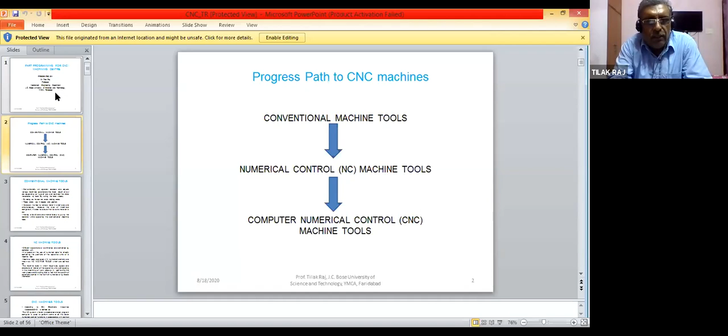You can see these NC machine tools here, in which magnitude, speed, and direction of motion of the operating units are controlled. What are the operating units? Different slides like X-axis slide, Y-axis slide, Z-axis slide. Sometimes we also have rotary units, so rotary motion is also controlled. All these are known as operating units. So here, speed, magnitude, and direction of motion are controlled, not only for positioning the workpiece, but sometimes for positioning the cutting tool also.

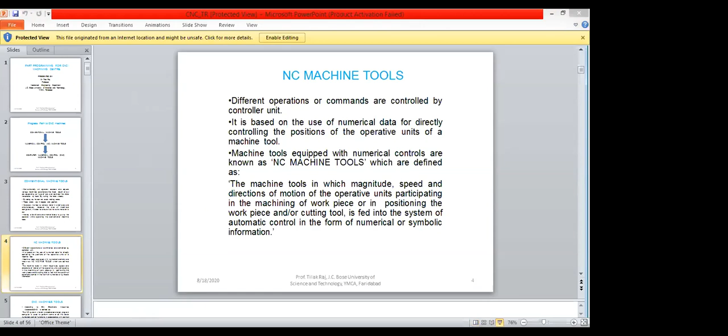Okay, so done sir, fine. Previously parts were manufactured on conventional machine tools in which feed motion of the slides and setting of the job was done by the operators, so many errors were made by the operators. So all the components made in one lot were not of the same quality and dimensions; major variations were found in them.

Seeing these difficulties in manufacturing good quality components, NC machine tools were developed, in which the magnitude, speed, and direction of motion of the operating units, which are participating in machining the workpiece or positioning the workpiece or cutting tools, could be controlled. This line is very important: magnitude, speed, and direction of motion of the operating units.

What are the operating units? Different units, you can say x-axis slide, y-axis slide, z-axis slide, or sometimes rotary units are also there in which rotary motions are given. So these are participating in machining of the workpiece or in positioning the workpiece or cutting tools.

Not only is the workpiece positioned, but the cutting tool is also positioned. So for controlling these types of operations, information is fed in the form of alphanumerical form to the controller of the machine tool. Why alphanumeric form? Because some information may be in the form of alphabets and some information may be in the form of numerals, that's why it is known as alphanumeric information.

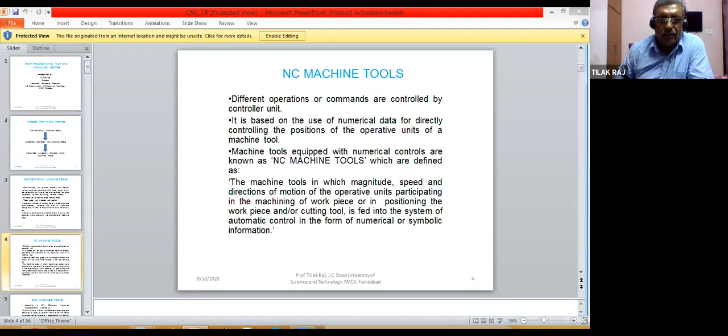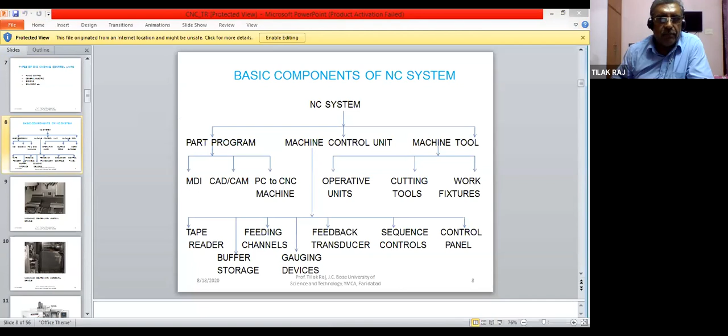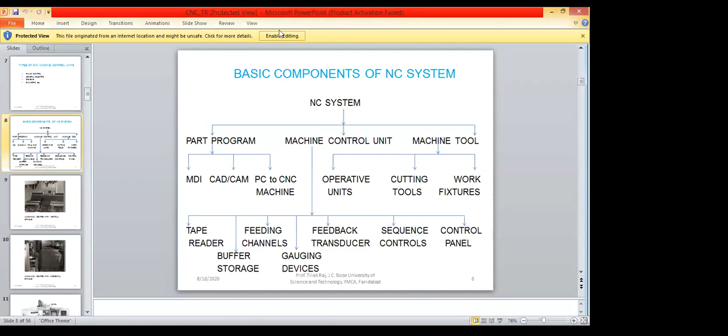Sir, your slide is still on slide number 4 only, but I'm reading slide number 8. Your slide is not moving. Why is it not moving? Please try a screen share again. Now it is on 8, sir, now it is visible. Should I move to slideshow? Please move the slides. Now it is clear. Can you see slide number 8? It is seen here, but the slide share is not done, sir. First, at the top you should click on enable editing.

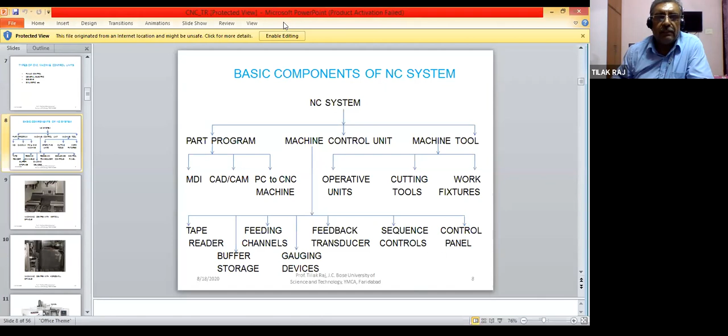The new share is there. Participants, security, annotate, remote control.

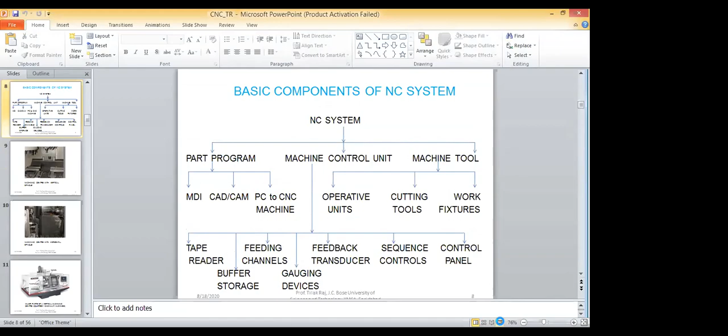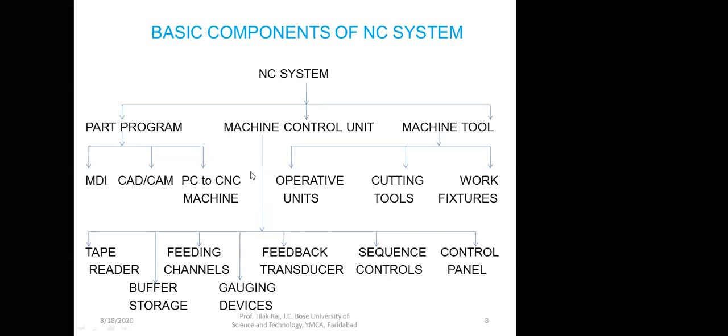So we were on the gauging device. Gauging device measures the actual movement of the slides, and they see whether the command has been obeyed by the servo motor or not. Feedback transducer - these transducers give feedback to the controller unit, so whatever command has been supplied to the servo motor, that has been activated or not.

Then sequence controls are there, so they manage the sequences of all the parts. Like tape reader decodes the tape, then buffer storage stores the information and supplies it to the controller unit, then feeding channels do their work, gauging devices and feedback transducer supply the feedback to the controller unit. So all this is done in a sequential manner, with the help of sequence controls. Next component is control panel.

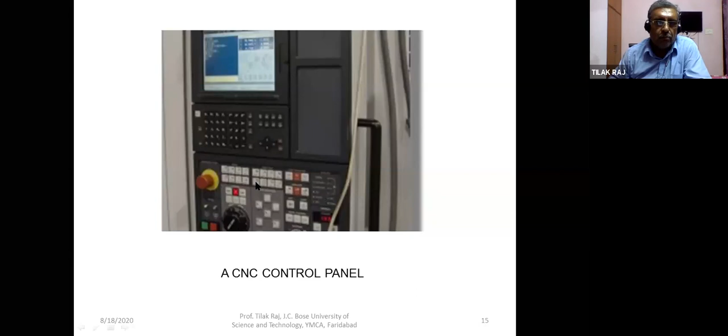Then different speed override, feed override buttons are there. Coolant control buttons are there - they can be on, off, etc. So the operator can do different operations with the help of these buttons on the CNC machine tool. This part is known as operator control panel, and this is known as machine control panel.

Then the third part is machine tool. Machine tool has different operating units, as I told previously - different slides are there, like x-axis slide, y-axis slide, z-axis slide. Not only slides, but other operating units are also there, like tool magazine, ATC - auto tool changer, for changing the tools automatically from the magazine and putting it into the spindle of the machine tool.

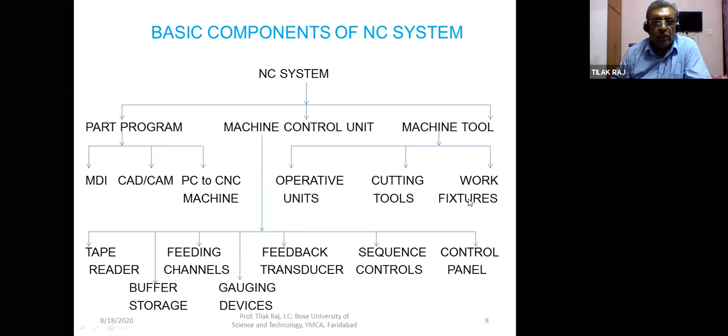Then cutting tools - different types of cutting tools like drill, reamer, boring bars, face mill cutter, end mill cutter are used. And then work fixtures - these are the fixtures used for holding the workpiece over the machine tool. Different flexible types of work fixtures are also used on CNC machine tools. So this is just briefly about the basic components of CNC machine tools.

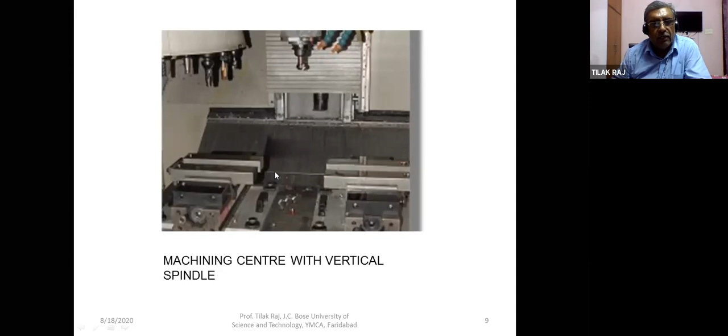Another version is horizontal machining center - machining center with horizontal spindle. So here you can see this spindle is horizontal, that's why this is known as horizontal machining center, or machining center with horizontal spindle. These two types are mainly used.

But otherwise, a third type is also there, known as UMC, Universal Machining Center, in which the spindle can be oriented in vertical position, horizontal position, as per requirement, or in any inclined position also. So you can change the position of the spindle - vertical, horizontal, or at any angle you want, say 60 degrees, sometimes a hole is required at an angle, so that can also be done. That's why it's known as Universal Machining Center.

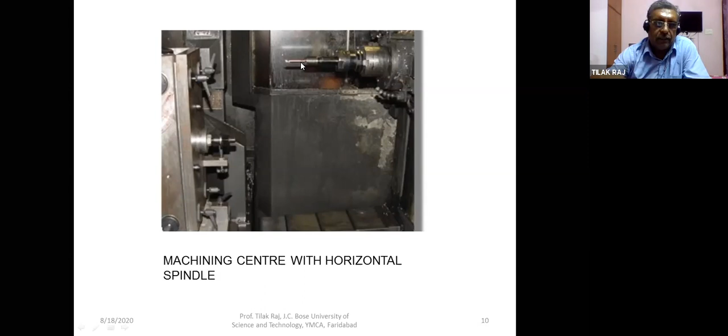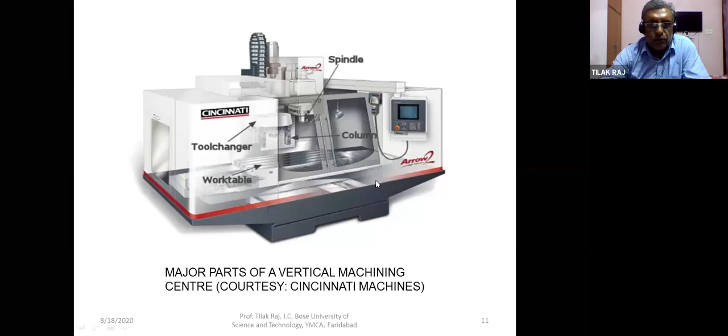This is the tool magazine, a vertical type of tool magazine. You can see a number of parts here. A small tool magazine can be round type, in which 8 or 10 tools can be mounted. Sometimes we can mount 90 tools, 120 tools, or 60 tools. Whenever a large number of tools are to be mounted, this large magazine is used. Here you can see the tools mounted on the tool magazine.

These are different pods, known as tool pods. This is one tool pod, this is another, and side by side this numbering will be there. If 60 tools are there, the numbering will be 1 to 60, 1, 2, 3, 4, 5, like that. This marking is there for each tool, so that whatever tool you put in any pod is known - if you put a tool in pod number 1, it will be known as tool number 1.

So you will use T01 for that in the part programming. If you put a tool into pod number 5, you will use T05 for that tool in the part programming. In this way, tool numbers are given for identification in part programming, and there should not be any mistake. Suppose in part programming you are using a tool of 10 dia and you have given tool number T06 - you should take care that this tool is in pod number 6. Otherwise, a mistake will be there.

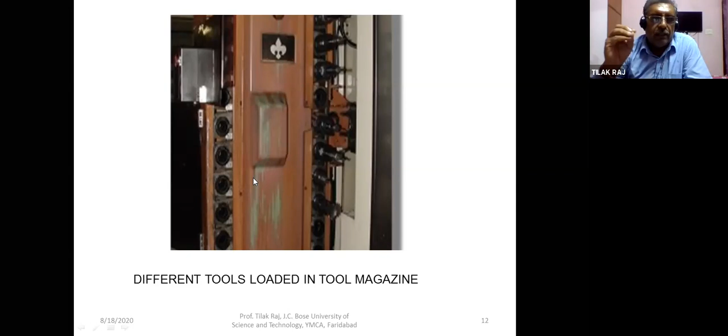Okay, so in this way, automatically our work is controlled. Then these are the tool holders and cutting tools of the CNC machine tools.

A specific shape is given to the tool holder. This tool holder has a special taper, which can be ISO taper or BT, meaning British taper. According to these standards, the tapers are prepared, and the same taper will be there in the tool magazine pod and in the tool spindle also.

Here the tool changer grip area is there, so the tool changer arm will grip this tool holder, and in this position you can put the tool. This is the actual cutting tool, and this is the holder. You can mount the cutting tool in it, tighten it with this grub screw, and then put this tool into the magazine or in the spindle.

This is known as the retention knob, and this portion is the pull stud. Threading is done here, so with the help of the threaded stud, it will go into the holder. This retention knob is there for getting a kick from the spindle whenever a tool change is to be done from the spindle or from the tool magazine.

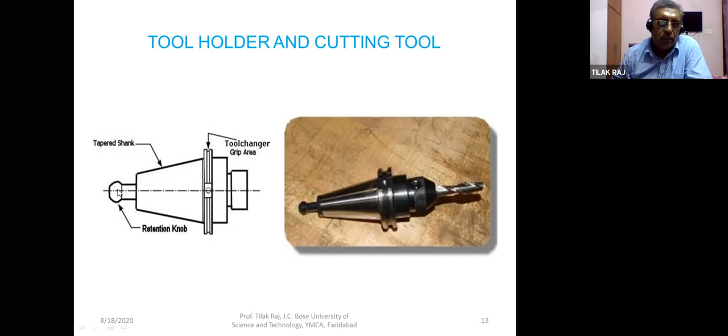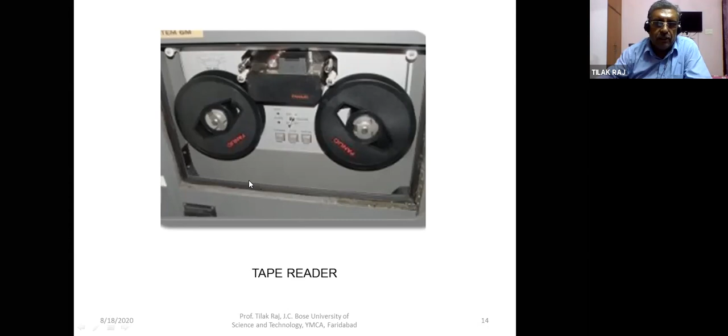So this is the work of the tape reader. And this is the control panel, already discussed.

Then the NC machining procedure. Before we go to part programming, we should know the machining procedure on CNC or NC machine tools. Different steps are there; the first is part drawing study.

First, carefully study the part drawing. See what type of operations are required on the component, whether drilling holes are required, or some milling work is required, or whether it is for a machining center or turning center, and what type of machine is to be used.

First study the part drawing and note down the different operations. If holes are required, note the size of the hole and the accuracy required, whether accurate and precision holes are needed or general holes. For example, if I write dia 20 hole, it means general tolerance holes. But if I write dia 20 H7 hole, it means H7 tolerance is required on the hole, and a reamer will be used for that to produce a good quality hole.

Then process planning: as per the operations required, process planning is done, determining what operation should be done first, second, third, and so on. A process planning sheet is prepared.

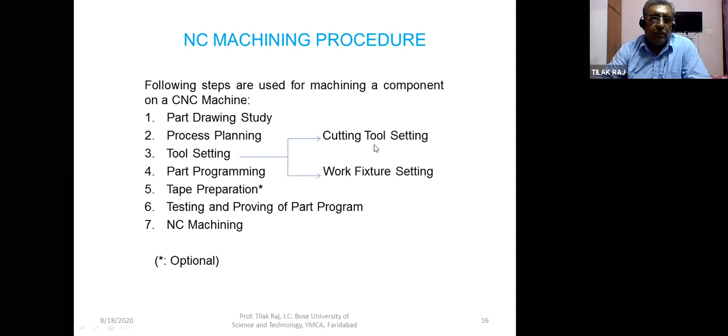If any error is there, it will be observed during machining of the components, and components can be rejected due to a small error in the part program. Sometimes accidents may also occur during machining if these errors are not removed. After testing and proving the part program and removing the errors, actual NC machining is started.

Now, fundamentals of the part program. First we should know what a part program is. It is a set of instructions in the form of alphanumerals to be followed by the operating members of the NC machine tools for machining a particular component. In simple words, it's a set of instructions in alphanumeric form - alphabets and numerals - to be sent to the MCU, machine control unit, of the CNC machine tool for controlling different operating members of the machine tool.

So what should be the desired qualities of the part program? One should have some understanding of the part drawing - whenever a part program is to be prepared, one should be able to read the part drawing: what is needed, what type of operations are needed, what is the material of the component, whether it is soft or hard, what type of cutting tool materials will be needed, whether HSS will do, or whether the cutting tool should be of carbide or ceramics, etc.

Once one is able to study the part drawing, only then can he have further discussions about the operations to be done on the part. He should also have some knowledge of mathematics.

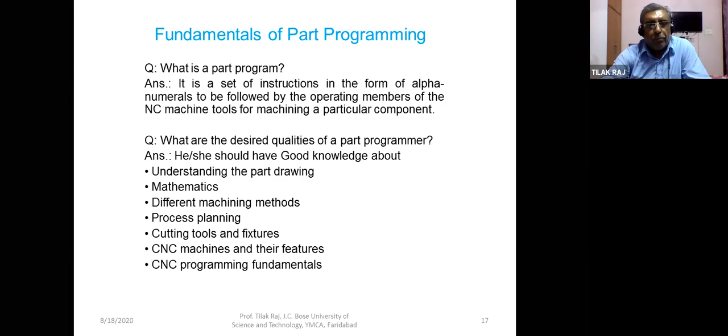Then, standards of functions of part programming. There are two types of standards: one is the EIA part programming system, another is ISO based. EIA means Electronic Industry Association system, and the other is the International Standardization Organization. In this course, we will discuss everything based on the EIA RS-244A type system.

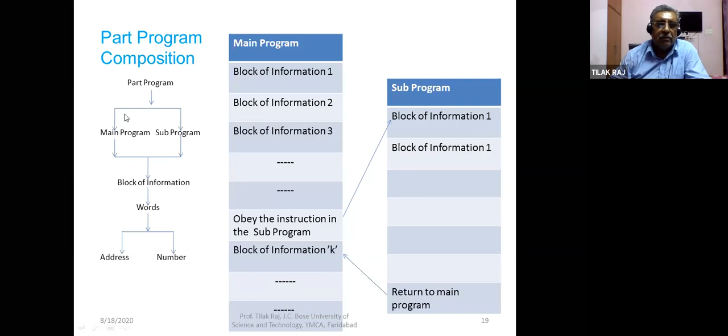So here some addresses are used in the CNC machining center. We are basically discussing the codes of the FANUC system. I have taken these codes from the FANUC system, but as I told earlier, if you are conversant with any system, you can prepare a part program in any controller unit like General Electric or Siemens—any control system you can handle, but the basics should be clear. So one thing is the ISO address and their meaning.

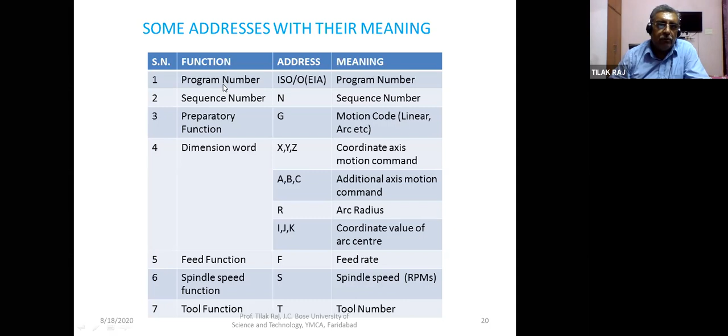ISO can be used for part program. First of all, you have to give the part program number. Whenever we are preparing any part program, you will have to identify this as the ID of the part program. The ID is given with the help of ISO, or O in capital, in the EIA coding system. So if I use O, then if I use O1000, 1000 will be the number of that part program, and O will identify that it is in the EIA system.

Then the sequence number. Any block of information is addressed by capital N.

With that, some number is given. Then preparatory functions are there, like G code. That is the preparatory function. For different linear and arc curvilinear motions, we use different G codes.

Then we use some addresses X, Y, Z. These are all dimension words. X, Y, Z are coordinate axis motion commands. A, B, C are used for additional axis motion commands, basically rotational axis.

If you want rotation about the X axis, A is used. If rotation is about the Y axis, B is used. If rotation is around the Z axis, C is used. So these are additional, or rotational, axis motion commands.

So basically a CNC machining center can be of 3-axis type: X, Y, Z. But it can be 6-axis also if you have these 3 rotational axis facilities too.

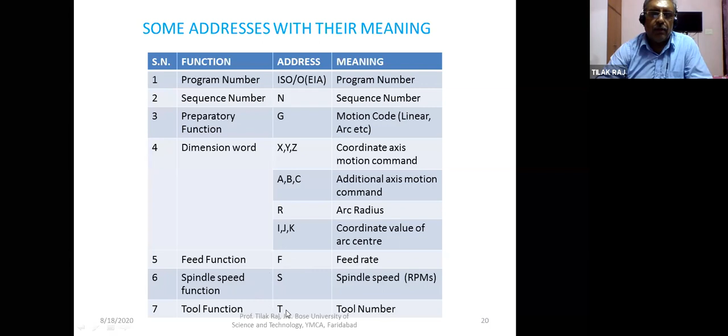Then miscellaneous functions, M is used, like for on/off control of the machine tool or tool change, such as M01, M06, M07, M08. These are different miscellaneous functions used for controlling the machine tool.

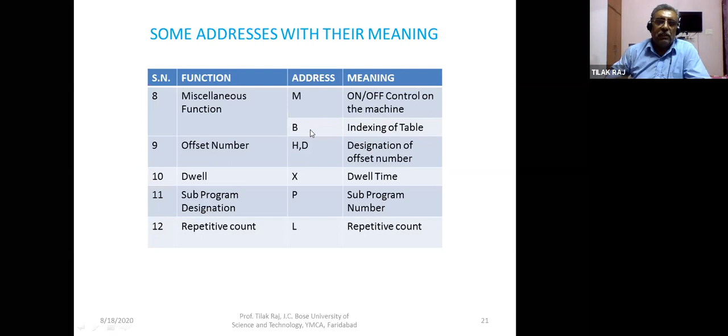And then B is used for indexing of the rotary table. Whenever a pallet is used in a horizontal machining center, or a rotary table is used in a vertical machining center, indexing of the table is done with the help of capital B.

Then offset numbers can be defined with capital H or capital D. Length offset is defined by capital H, and radius offset or compensation is defined by capital D. How they are used we will see in the coming slides.

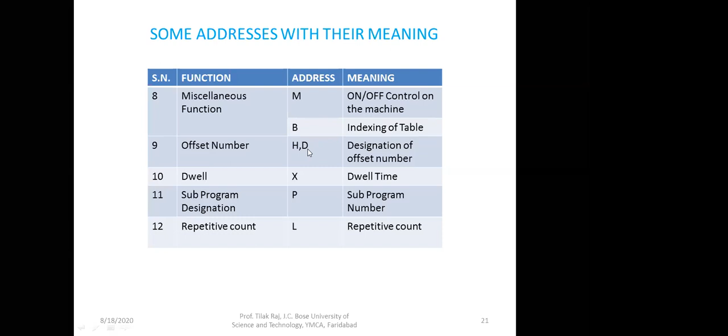Then dwell: anytime you want to stop a machine tool for a particular time, it can be dwelled, and some time can be defined. So X5 means you can stop the machine in a particular position for 5 seconds.

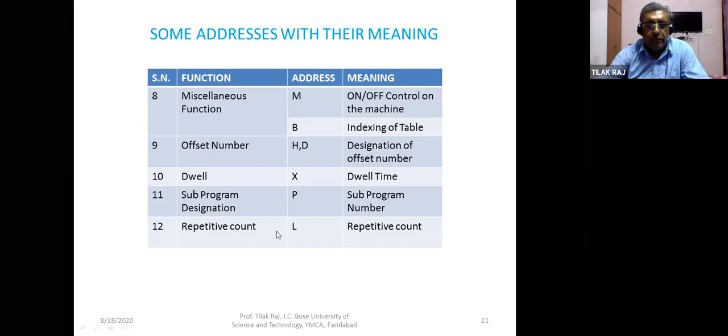Then capital P is used for subprogram designation. Main program designation is capital O, as we have seen in the previous slide, and subprogram designation is capital P. Capital L is used for repetitive count, anytime you want to repeat any function.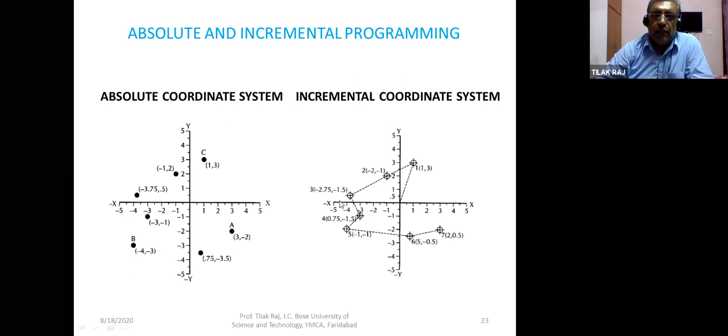Accordingly, these are known as absolute programming system and incremental programming system. So if you are using absolute coordinate, then it is known as absolute programming, and if you are using incremental coordinate, then these are known as incremental programming system.

Then you should know what is machine zero and program zero. Machine zero is a position located at the farthest possible distance in the positive direction along the machine axis, all the axes - x-axis, y-axis, z-axis. This is permanent, and is set for each particular CNC machine tool by the machine tool builder. So that is the machine zero.

And program zero, this is also known as work zero, the position that acts as the origin for the part program of a particular workpiece. Suppose any table is there on the CNC machine tool, then the workpiece may be located on this table anywhere. So the machine should know what is the position of the program zero, from where the program has to be started. For that, one particular corner of the job is set, so that is also known as work zero or program zero. So for making the component position known to the machine tool, this program zero is defined. This is changeable for every component, depending on how you are fitting it, how you are putting it on the machine tool table.

That position will be different for each component, and that should be well defined and told to the machine in the form of work offset. Work offsets are generally defined in G54, G55, G56, etc. These are different preparatory functions in which this work coordinate, or program zero, is defined. Work coordinate and program zero, work zero and program zero, are the same thing. So for each component, this is the basic definition from where the program will start, this program zero.

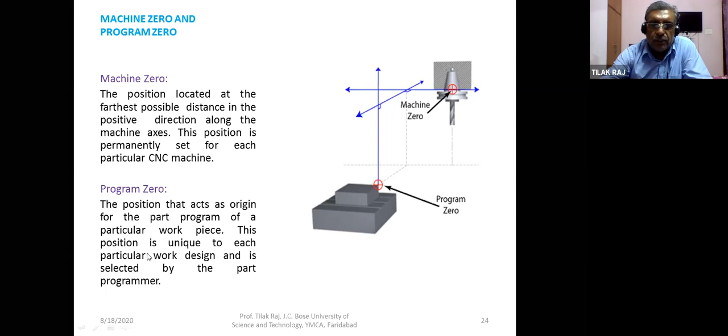Then coordinates. Basically three linear axes are there in the CNC machining center, and three rotary axes are there. As I told you, x-axis, y-axis, z-axis, three axes are there. If the rotation is around x-axis, the additional axis is known as a-axis. If the rotation is around y-axis, this is known as b-axis. If the rotation is around z-axis, this is known as c-axis.

These are the coordinate systems, and they are defined by the right hand rule. In the right hand, the position of the thumb gives the x-axis, the position of the front finger gives the y-axis, and the middle finger gives the direction of the z-axis. So the right hand rule is followed.

You can see here on the actual machine, x-axis, y-axis, and z-axis. Generally the z-axis is perpendicular to the machine table. If it is a vertical VMC, vertical machining center, the vertical spindle will be there, and the table will be in the XY plane. If it is horizontal, then the spindle will be perpendicular to the work table, or to the component which is positioned on the workpiece on the machine table.

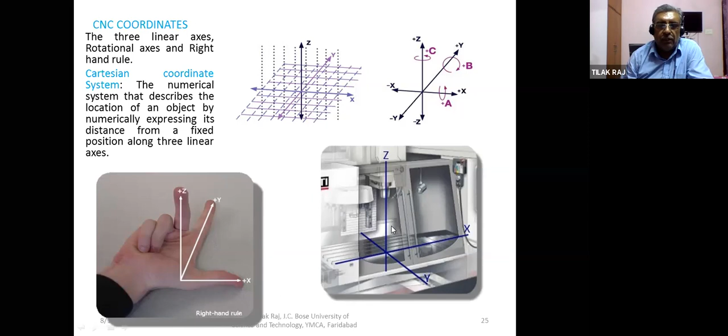Now the main codes. Two types of codes are used in CNC programming. One is preparatory codes, also known as G codes, and another is miscellaneous codes, or M codes. So one by one we will discuss all these codes.

G codes: G00 is for rapid traverse. Whenever you want to move the machine table in rapid mode, you will use G00. Suppose this is your current position or start point of the machine, and you want to move to this end point, that is 50 in the x direction and 30 in the y direction. So you can give G00 X50 Y minus 30.

Y plus is in the upper direction, and in the lower position it is minus 30. So you can give G00 X50 Y-30. In this position, the machine will move rapidly to this end point, and it will reach here.

But if you want to move in linear mode, for some cutting, then it will be defined by G01, that is linear interpolation. So linear interpolation is defined by G01.

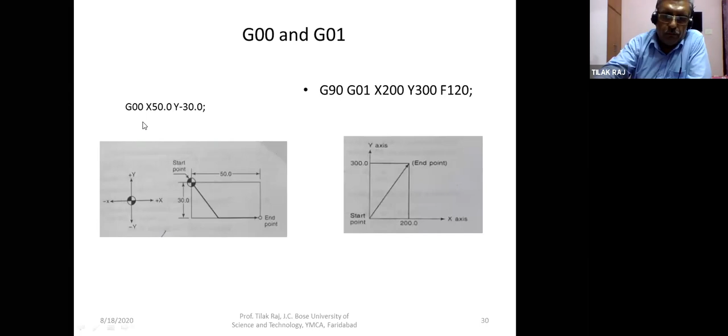Then G02 and G03, these are for circular interpolation - circular interpolation clockwise and circular interpolation counterclockwise. If you want to do the machining in a clockwise arc, then G02 will be used. If you want to move this tool counterclockwise, then G03 will be used. So we'll see the example.

Before that, G17 and G18 are also defined, for understanding the planes. G17 is for XY plane selection, G18 is for ZX plane selection, and YZ is defined by G19. They are used in some cases.

So here you can see, this is G02 and G03, you can see in G17 plane, G18 plane, and G19 plane. So clockwise motion is done with the help of G02, and G03 is for counterclockwise.

And then you have to give the end point of the arc. So first of all, you have to define the plane, whether it is XY plane, then G17, then G02 for clockwise, and G03 for anti-clockwise or counterclockwise. Then give the end point of the arc - these are the end points of the arc.

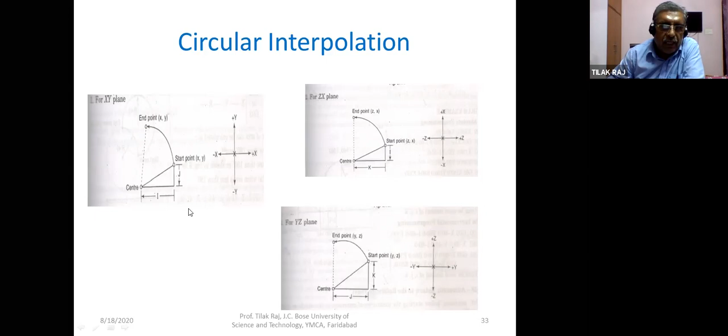So here you can see some example is given. Generally people get confusion with I and J. You can see here this example - let us say this arc is there. Its start point is X 200 and Y 40. From here we are starting.

So G90 absolute programming, G03 because it is anti-clockwise. End point of the arc - what is the end point? X 140, Y 100. Then I and J - what is I? I is the distance in x direction from start point to the center of the arc. How much? 60. So this is in negative x direction, that's why I minus 60, and then feed is given. In I and J, there is no incremental distance in y direction, that's why J is 0.

Similarly, for this arc, you can see - so what is the end point of this arc?

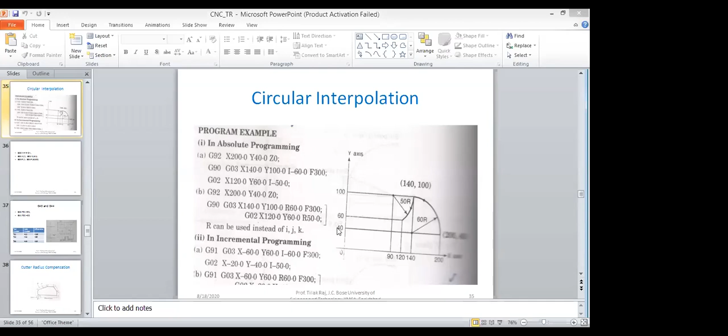Now it is okay, yes sir, everything is okay. Please start sir. So we were here, we were discussing this arc.

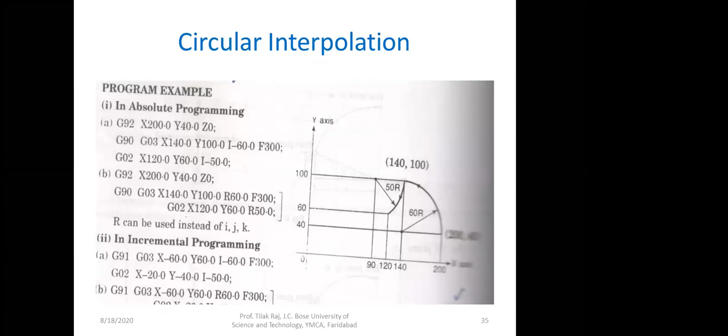So now if you take example of this arc, then it is in clockwise direction in this way, so we will have to use G02. Here the endpoint will be 120 and 60, and you will have to move from start point to the center 50 millimeter, that's why I minus 50 is written. G02 X120, endpoint of the arc X120 Y60, and I this one. And then the same feed will be obeyed. So this is the example.

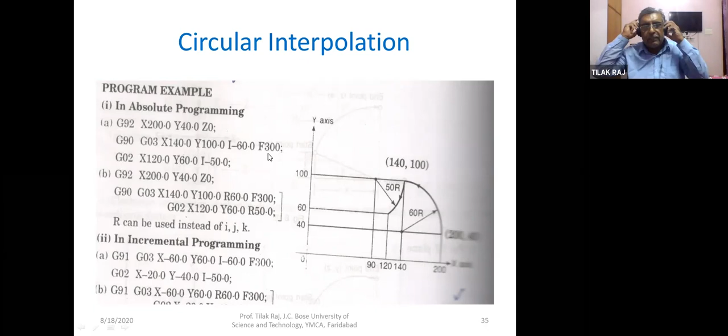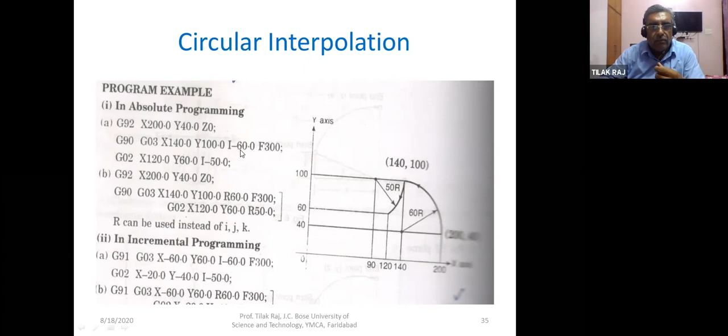So generally people make mistakes, they are not conversant with this use of I, J, K etc. So for that you can simply use the radius command also with the help of radius. So you can see here this case - G02, you can see example of this arc.

When the arc is less than 180 degrees, the endpoint of the arc and radius can be used. When it is more than 180 degrees, then radius minus, r minus, can be used. Both arcs are there, but one is less than 180 and the other is more than 180. It is very simple to define the arc with the help of this radius system, the radius command. In I, J and K some mistakes can occur, but with this method no mistakes are there.

Hello. Hello, Vimlesh. Yes sir, yes sir, okay.

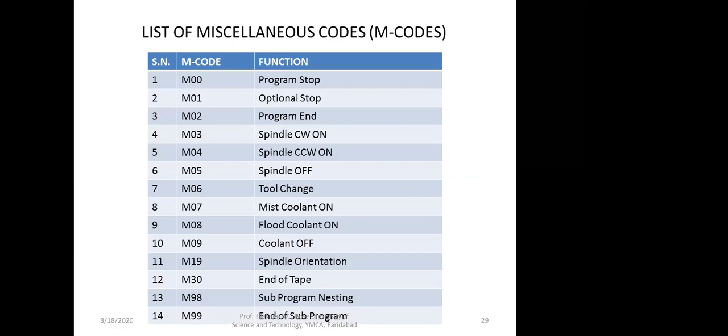Then there is dwell, dwell time. This dwell time is defined with the help of G04. What is dwell? Anytime you want to stop the machine at any position, like for your spindle, you don't want to stop the spindle but want to rotate it at the same position. Let's say a grooving tool is being used and you want to do grooving at the same position for sufficient time so that a good finish is obtained. Then you can stop the spindle from moving forward, it will keep rotating, but you stop it at the same position by dwelling it. You can give time with G04 like X5, meaning for 5 seconds it will be stopped. It can also be done with the help of P, G04 P, but you will have to multiply the time in seconds by 1000, so P5000 you will have to define. This is used for dwelling purposes.

Then G17, 18, 19 are used for plane selection.

G20 is used for inch input. Whenever all dimensions are in inches, G20 can be utilized. Whenever you want to use the metric system, G21 is used. G28 is used for returning the machine tool to the reference point, in mm. So G28 X0 Y0 Z0 can be given. That is generally done.

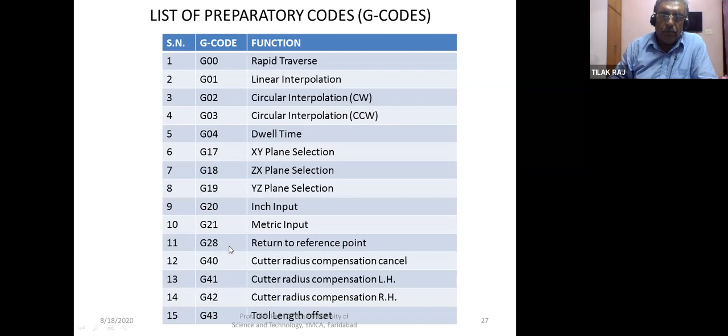Let's say a factory is running in two shifts, morning and evening. After the night shift, no work is there, and machines will be switched off at night. So whenever a worker comes in the morning and starts the machine, it is necessary to reference the machine, to read the machine zero, because the machine should know where its zero is, then it will start working from that zero. This can be done manually with the help of manual jog, or it can be done automatically with the help of G28 X0 Y0 Z0. So it will reference the machine to its reference points.

Then G40, 41 and 42 are used for radius compensation. G41 is used for cutter radius compensation on the left hand side, and G42 is used for cutter radius compensation on the right hand side, and G40 is used for cancellation of both types of compensation. We will see in the slides how it is done.

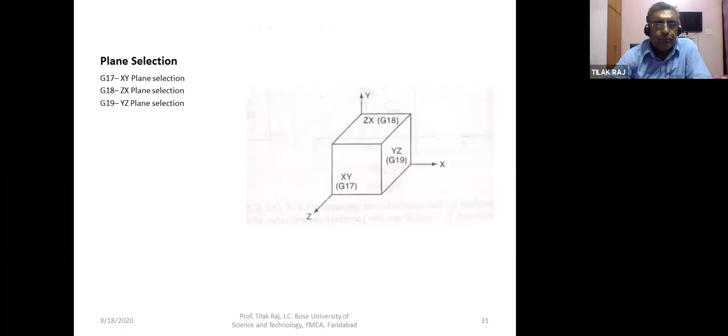But the cutter will be shifted and it will cut the end surface of the job. So there are two types of cutter radius compensation: G41 and G42.

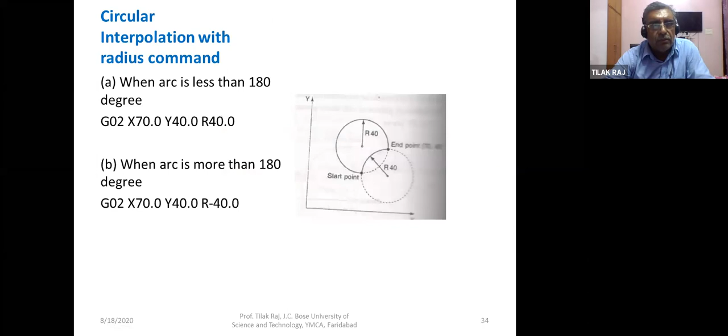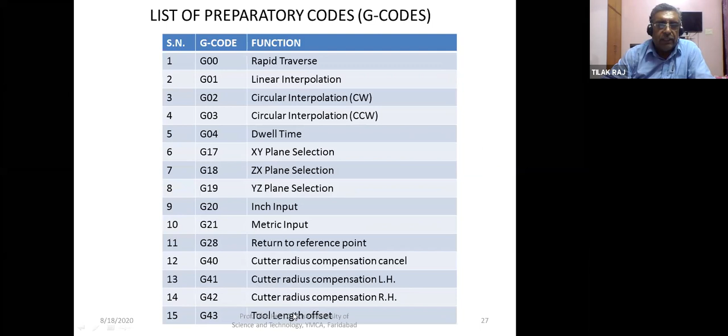After its use, it will be cancelled with the help of G40. Whenever compensations are used, they are cancelled also, so with the help of G40 it is cancelled. So these are for radius compensation. And after that, tool length compensation - tool length offset or tool length compensation is activated with the help of G43 and G44. G40, G43 and G44.

Now all the tools may not be of the same length, their length may be different, but we want that every tool should come - and if this is the top surface of the job - every tool should come and stop at 2-3 millimeters above the job surface, and then it should start cutting, drilling, or whatever operation is there. So now how is this made possible? Tools are of different length, the job is same, the machine is same. How is it done? This is done with the help of activation of tool length compensation.

So tool length compensation is activated with the help of G43, then tool number, and it is done with the help of capital H. As I told you, capital D is used for radius compensation, and H is used for length compensation. There is, in the MDI - manual data input - one page in the computer in the CNC, where these details will be there: tool number, code number, and offset value.

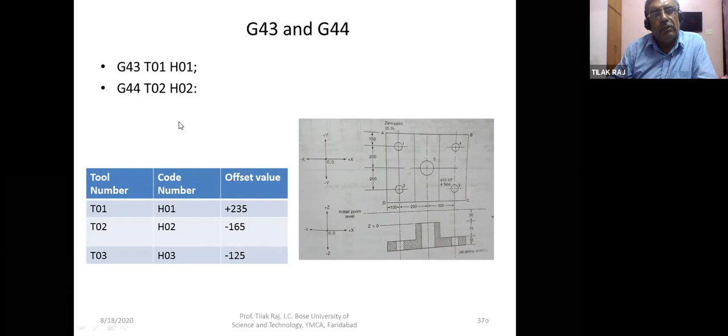H02 will read minus 165, H03 minus 125. So if it is positive, you have to use G43. If it is negative, you have to use G44. After its use, you have to cancel it with the help of G49. So G49 is tool length offset cancellation, also known as tool length compensation cancel. Tool length compensation or offset is the same thing.

Then G54 to G59, these are work coordinate systems. Work coordinate system is used to define the position of the workpiece over the table. The table of the machine tool is very large, and you have to put a fixture on the table, then mount the workpiece on it. Now how will the machine know the position of the workpiece over the table? For defining this position, the work coordinate system is used. There are six types of work coordinate systems: G54, 55, 56, up to G59 you can use. Let me show you one example.

Let us say this is the top surface of the job. You have put this job over the table, and this is the thickness of the job. So how do you define any one corner of the job? You can define it as the work coordinate offset or work coordinate system.

You can use a stylus to touch one side of the job. If this is the X and Y position of the machine table, then if you touch here, it will give you the Y value with the help of the stylus. You note whatever reading comes on the screen of the computer.

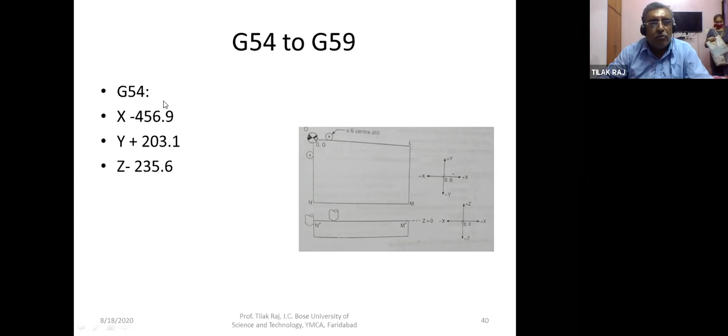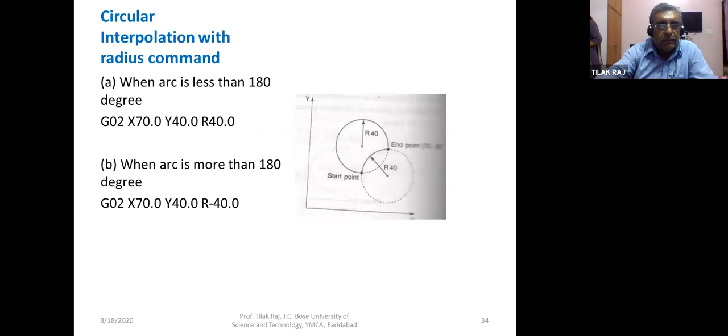Next is G54. Then G73, G74, G76 - these are machining cycles, also known as canned cycles. What is a canned cycle? A canned cycle is a cycle in which multiple tool operations are done with the help of a single command.

For example, G81 is a drilling cycle, so with the help of this cycle, drilling can be done. This is the peck drilling cycle, so peck drilling can be done with this. So any cycle where multiple tool movements can be defined with a single command is known as a canned cycle.

So wherever 'cycle' is written, these are the canned cycles. This is fine boring cycle. This is peck drilling cycle, drilling cycle, cycle with dwell time, and this is again peck drilling cycle. These are the different cycles used for machining purposes.

First, I will give you the example of the drilling cycle. Whenever simple drilling is to be done, G81 can be utilized. But when the job height is very large and the diameter is small - let's say a 5 millimeter or 10 millimeter hole in a 100 millimeter height component - in such cases, simple drilling will not work.

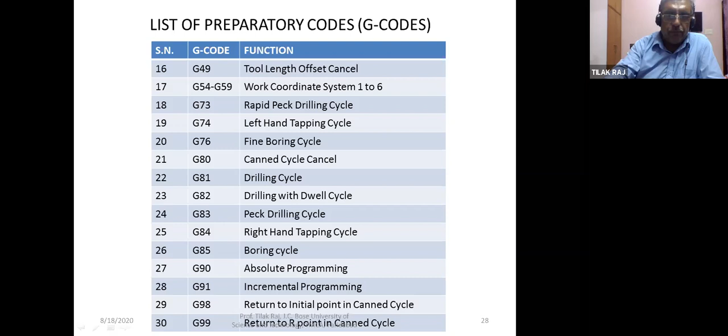So this is simple drilling cycle. You can see here G81. This is the rapid plane, known as R plane. Up to this, the tool will come rapidly. Then it will cut the job in cutting mode, and then it will revert back. So three movements are there: this, and this, and this. So multiple tool movements are there. That's why it is a canned cycle.

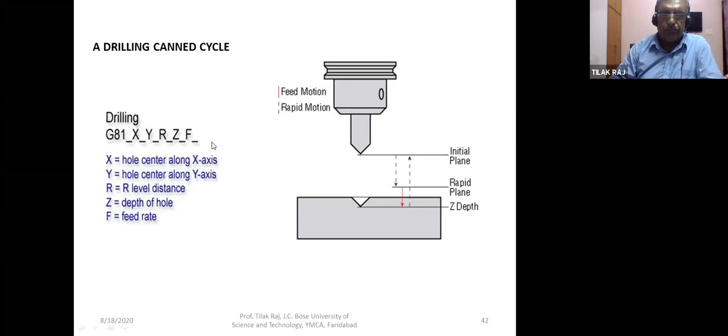So you will have to define in G81 the hole location, wherever drilling is to be done, the coordinate of the hole. Then R plane, the rapid plane - 2-3 millimeter above the job, you can define it. And then Z, what is the depth of hole, and then feed rate. So with the help of this, simple drilling can be done.

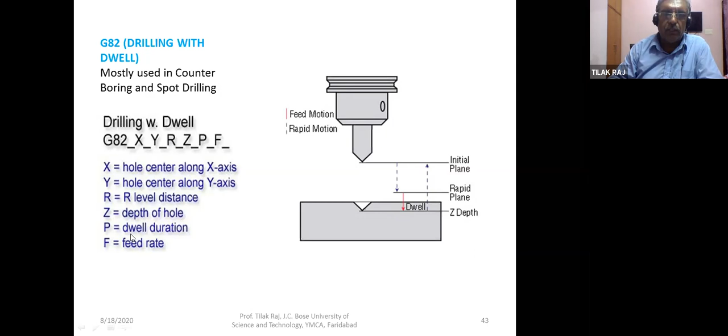Then G82, you can say this is with dwell. If you want to stop the tool at the bottom of the hole for a particular time, then it can be done with the help of dwelling. So you will have to give some time for that. Same X, Y, R, Z, F values are there. X, Y is the coordinate of the hole, R is rapid plane, Z is the depth of the hole, P is the dwell time - how much time you want to rotate the tool in the same position. 5 seconds, 10 seconds, etc. You will have to give the dwell duration. So with the help of G82, it can be done.

Then G73 and G83 - these are peck drilling cycles. In peck drilling cycle, the whole depth of the hole is not done in one go, as was done in simple drilling cycle, but in steps. First this step, then the tool goes back, and then it increases the depth up to this, then it goes back, then further increases the depth and goes. So in this way, chips are also cleared when it is returning back. This is the case when hole diameter is smaller but height is large. In such cases, if you do simple drilling, the chips will clog with the tool, and there are chances of breaking of the tool. So in such cases, it is done in steps with the help of peck drilling.

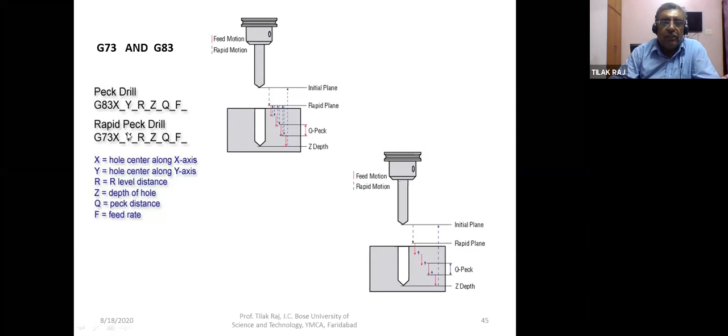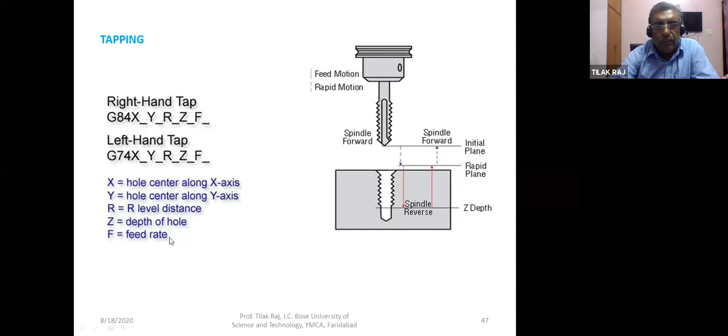These are other examples of this. Then tapping - internal threading is done with the help of tapping. Tapping can be left hand tapping or right hand tapping. Left hand tap is G74. Again it is simple - you have to define the same XY position of the hole, R rapid plane, depth of the tapped hole, and feed rate. Then G74 or G84 as per the right hand tap or left hand tap you have to use. So for tapping, G74 or G84 can be utilized.

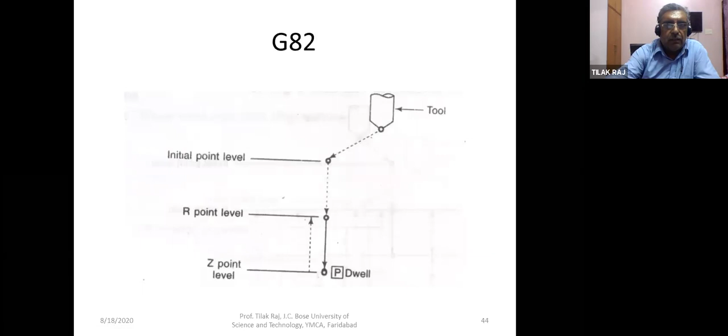One more thing is there, G76. So those were the simple boring cycles, in which, as I told you, the tool stops at the bottom and then is retracted back. But whenever you have to do some fine boring, let us say, bore of a car engine.

You are giving the final touch to the bore size. Let us say bore size is 100 millimeter plus minus 5 micron only. So 5 micron tolerance is to be maintained, but the finish should be a glass finish, it should be good.

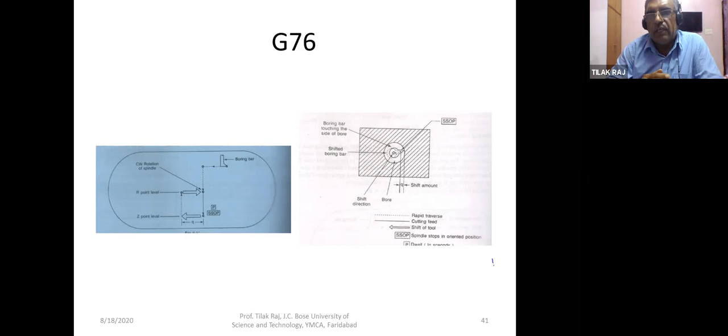So if you are doing this with the help of rough boring cycle like G85, G86, then the tool stops at the bottom and is retracted back. So when it is retracted back, it touches the side of the bore, and it will put a scratch mark over the inside of the hole. So which is not needed, it will damage the quality of the fine bore.

So for that, this G76 is used, that is the fine boring cycle. In that, what is done is when the tool stops at the bottom, it is shifted to one side, away from the wall of the hole, and then it is retracted back.

Okay, so that is the depth. So in G76, everything is defined: it will stop at the bottom of the hole, then it will orient in a particular direction, then stop, and then be retracted back.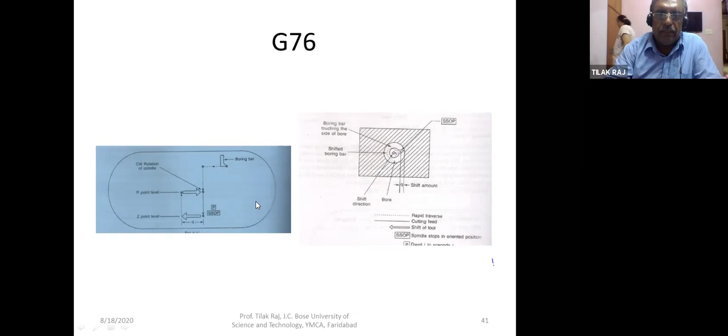So in this way, you can see here also. It will stop, orient in a particular direction, shift to a particular side, and then retract it back. So in this way, it will not touch the sides of the hole and will not damage them. That is the difference between simple boring and fine boring.

So in this way, these cycles are used. And after the use of each cycle, whether you are using G81, G82, G83, G84, any cycle you are using, at the end of use you have to cancel it with G80. So for cancellation of the canned cycle, G80 is used.

For all this, whether you are using G76, you have to use G80. Whether you are using G81, you have to use G80. So all the canned cycles are cancelled, their work is stopped with the help of G80.

Then G90 and G91. Absolute programming is done with the help of G90 - we have seen the example of absolute programming - and incremental programming is done with the help of G91.

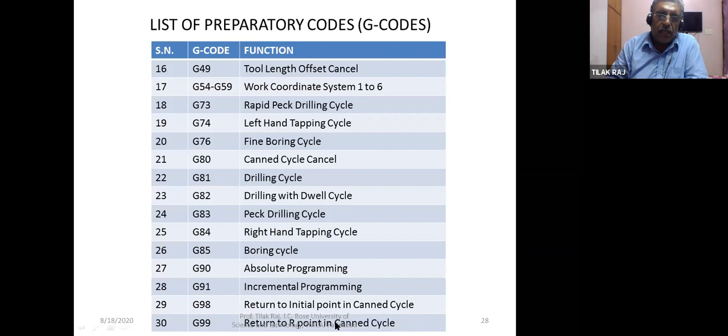And G98 and G99. G99 is return to the R point in canned cycle, and G98 is return to the initial point in canned cycle. So let us see this example also.

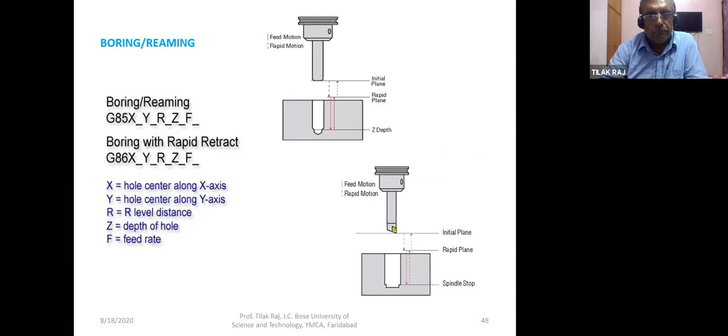So whenever this condition is there, you will have to use G98. What is the meaning of G98? That after completing the hole, after cutting the hole, there are two levels. One is the R level, which is near to the job, just 2-3 millimeter above the job - that is the R rapid plane position.

And another is the initial plane position. So before the R plane, what was the stopping point of the tool? That is the initial position. This is just above the R plane - it may be 50 millimeter above, 100 millimeter above, depending upon the part programmer.

So this is known as initial level. This is known as R level.

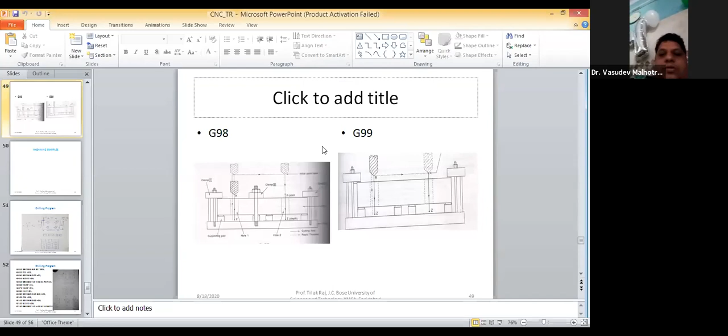Thank you, sir. This lecture will surely benefit all participants, including me also, because these are very detailed concepts which are very clear. So I hope it is very beneficial for us.